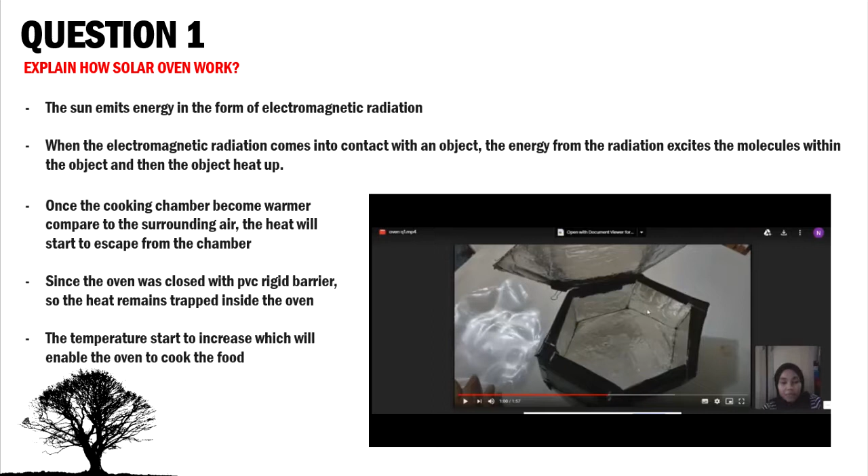In this solar oven, the reflector aluminium foil reflects sunlight into the chamber. Once the chamber becomes warmer than the surrounding air, the heat attempts to escape from the chamber. But since the oven was closed with a PVC rigid barrier, the heat remains trapped inside the oven. Then the temperature rises rapidly, which enables the oven to cook the food inside.

The main components for the solar oven to work are the reflector, the aluminium foil, and the PVC rigid sheet, which acts as retention to prevent heat escaping to the outside, and also the aluminium inside to make sure the heat radiates as electromagnetic radiation.

Now I want to justify our significant steps in designing the oven. First, why we use polystyrene: we use polystyrene for the base of the oven as the insulator to prevent heat escaping from the oven.

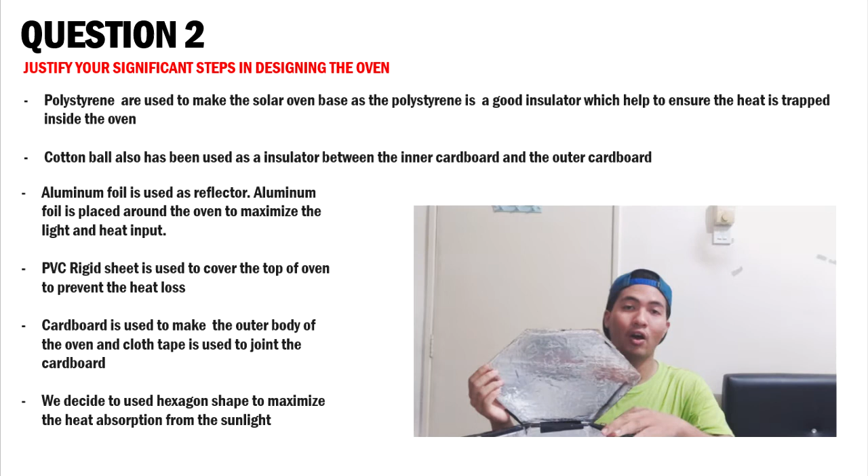We also use cotton wool between the inside of the cardboard and the outside of the cardboard as insulation for our oven. And to make the whole body and the reflector, we use cardboard.

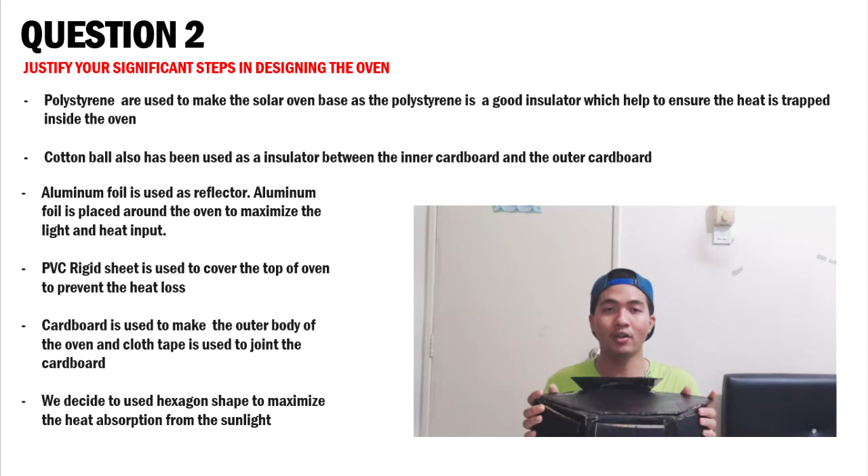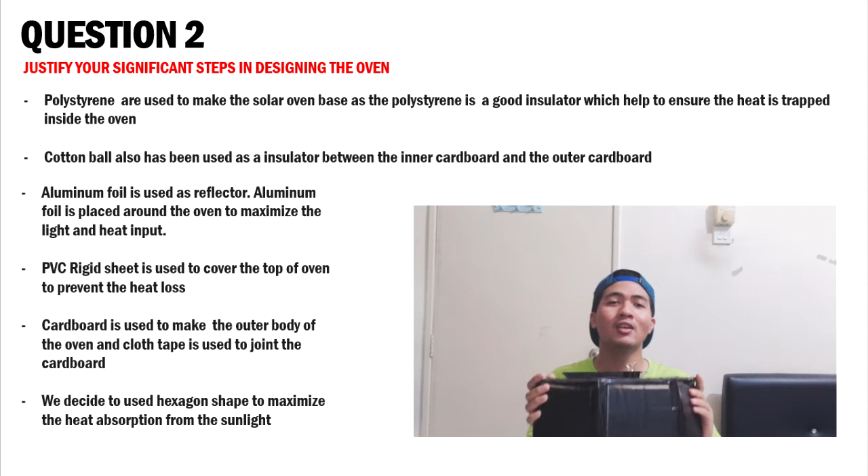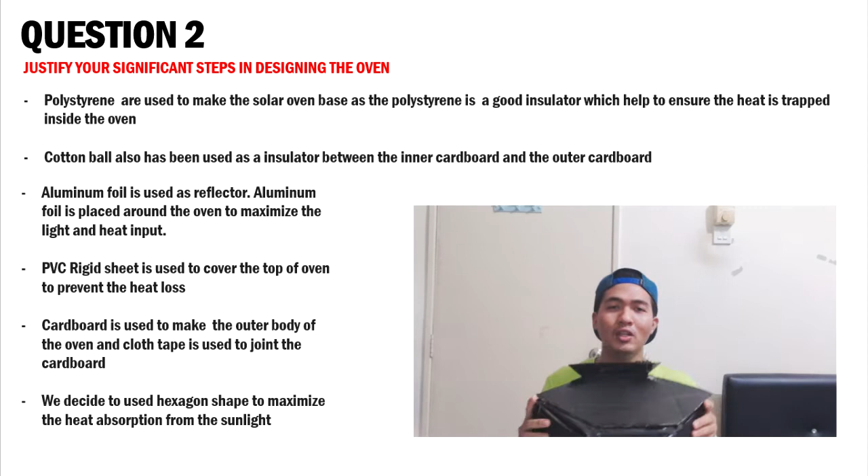To maximize the light input, we shaped it into a hexagon shape, which makes our design different from other designs, because it's the first time we use this shape. Usually we see the shape of a square, so it is a new invention to use a hexagon shape.

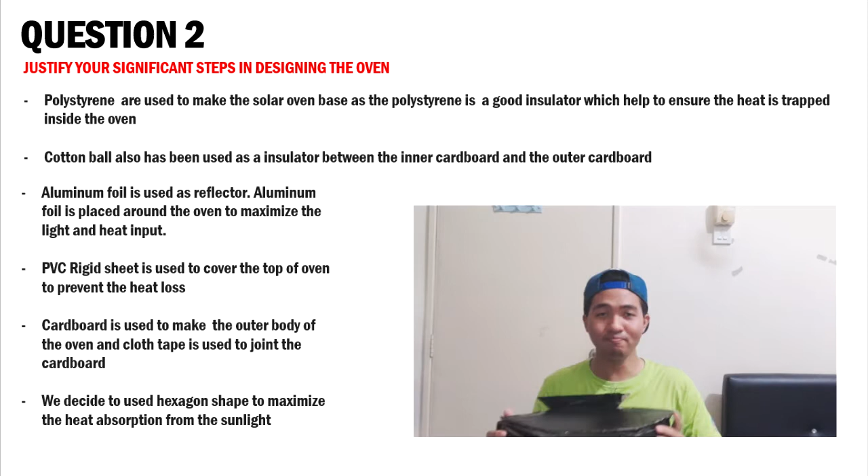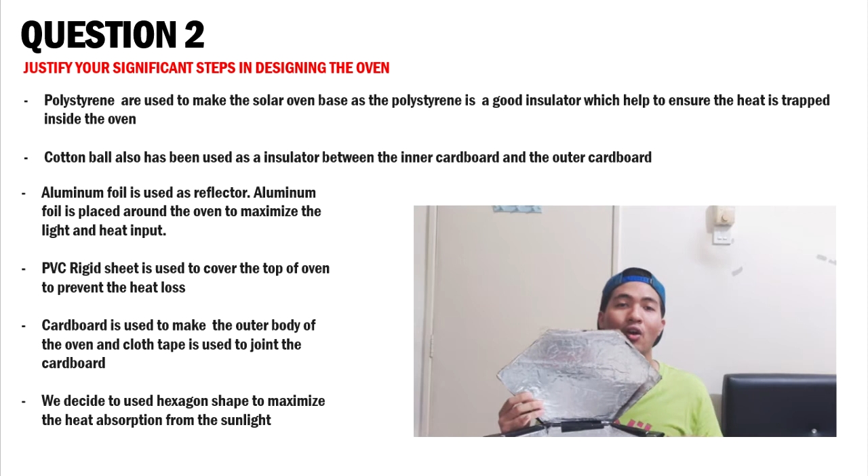The fourth point is about aluminium. We use aluminium as the reflector and on the inner side of the oven because we want to maximize the light input from the sunlight.

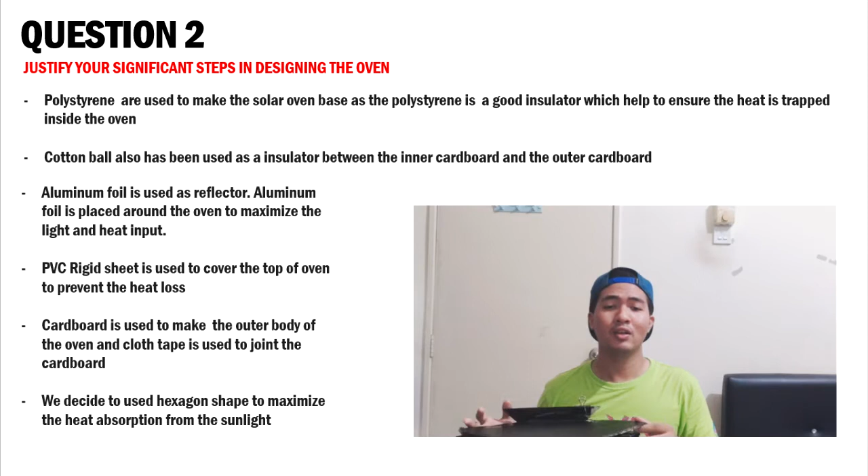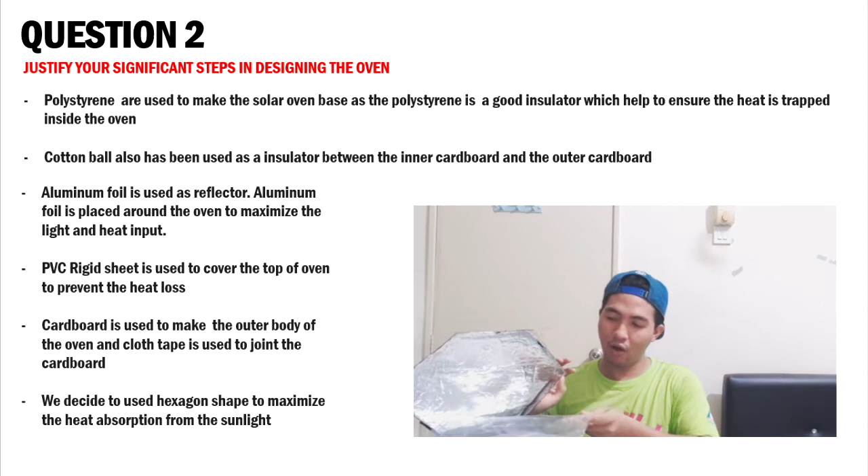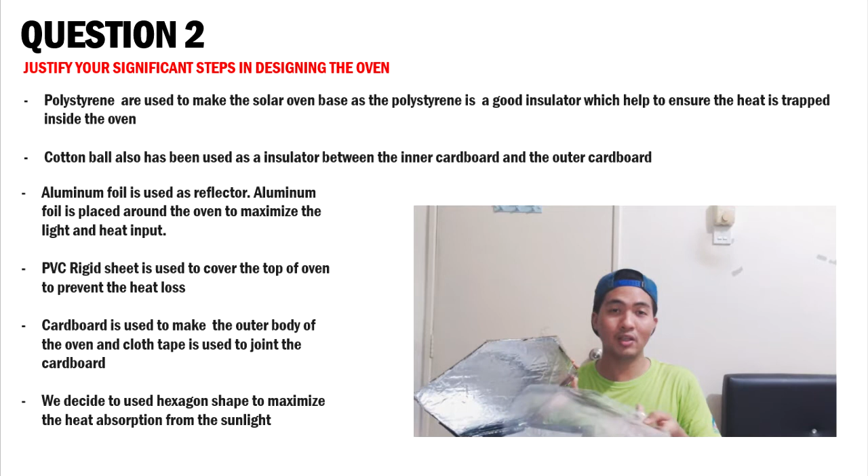We also use the PVC rigid sheet as the top of the oven because we want to prevent heat from escaping into the surrounding environment. So I think that's all from my explanation justifying why we made this design like this.

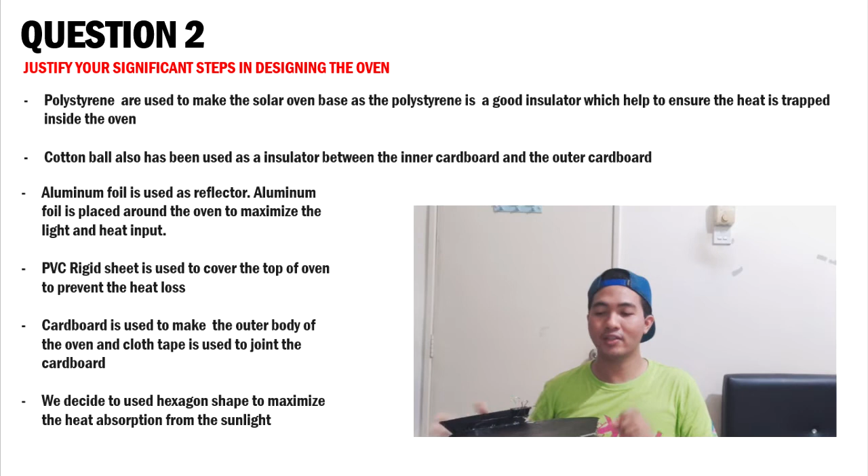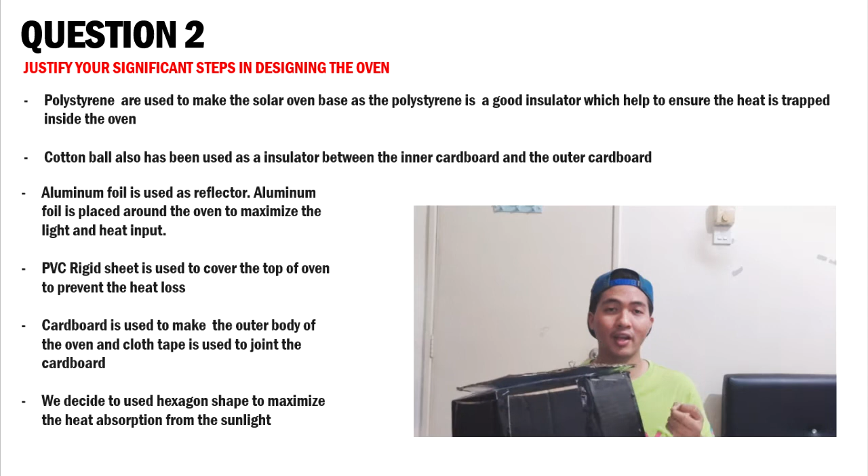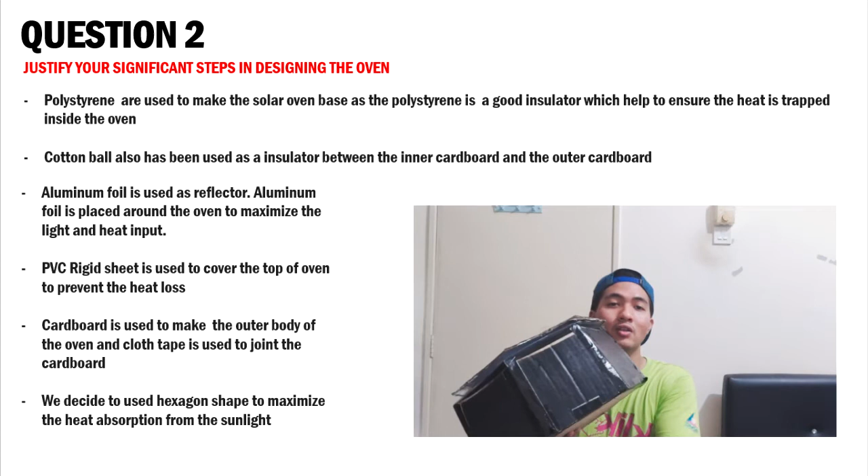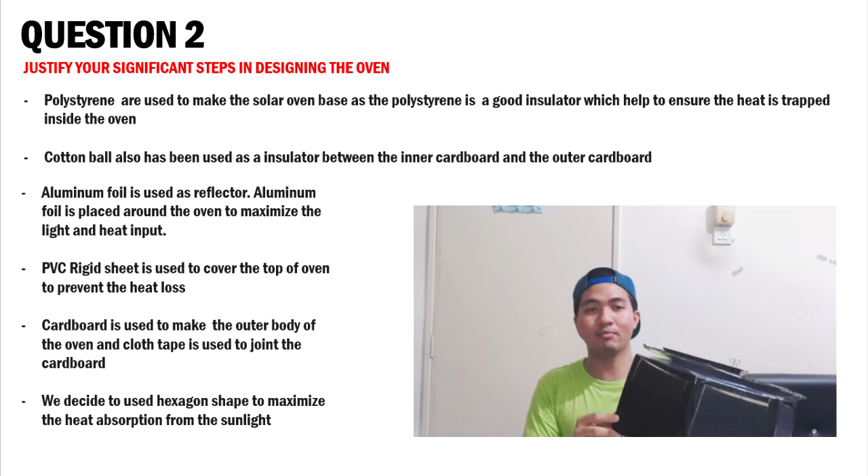Oh, I forgot something: we always use sellotape to join the cardboard. To make the cardboard stronger and not easy to break, we also use cloth tape to combine the cardboard pieces together to make this shape, so when we put it under the sunlight, it stays in the same shape.

Next is our suggestion to improve our solar oven. We adjust the angle of direction of the solar oven at which the sun radiation strikes the earth's surface, so that the cooking chamber faces directly toward the sun. The angle of direction plays an important role in maximizing the absorption of sun energy and concentrating the sun ray into the cooking chamber.

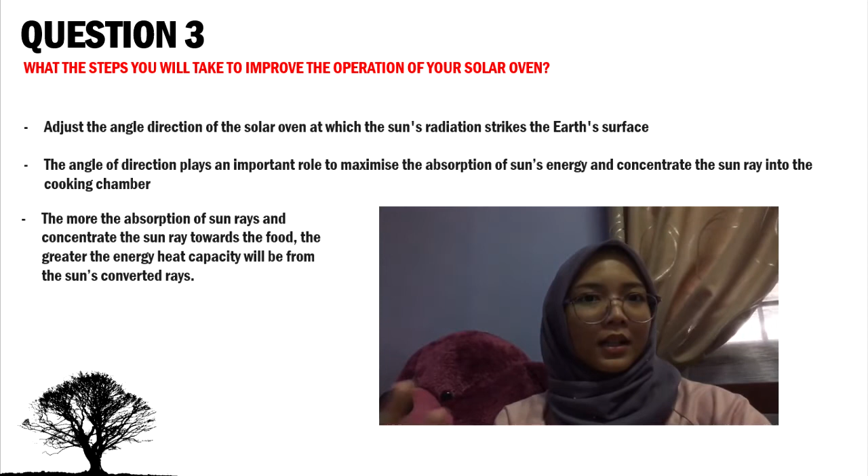This means the more the absorption and concentration of sun ray toward the food, the greater the energy heat capacity converted from the sun ray will be, which means the heat energy rate will be higher because the absorption of sun ray is maximized.

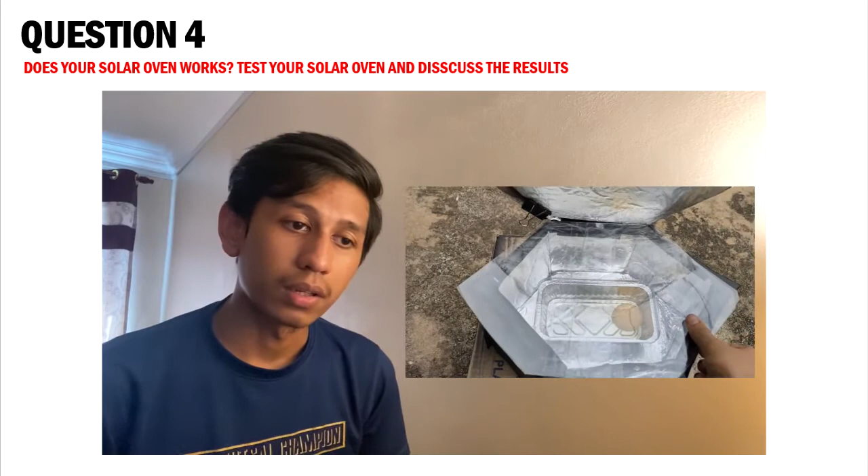Next, we put the aluminum container containing the raw egg inside the solar oven, then close the oven using the PVC rigid sheet. The purpose of closing with the PVC rigid sheet is to ensure the heat is trapped in the oven for a long time.

So this is the result after an hour of observation. As you can see at the bottom of the PVC rigid sheet, there is water vapor showing that the oven is hot, and you can also see a small white patch on the egg white, showing that the egg is partially cooked.

So the oven couldn't fully cook the egg because we couldn't gain enough heat to cook it due to the weather, which was windy at that time. So we decided to try again the next day.

So this is the result for the next day. As you can see from the video, the egg is fully cooked, and it's a little bit hard, maybe because it was exposed to the surroundings for too long. I've also provided some footage of our hexagon solar oven.